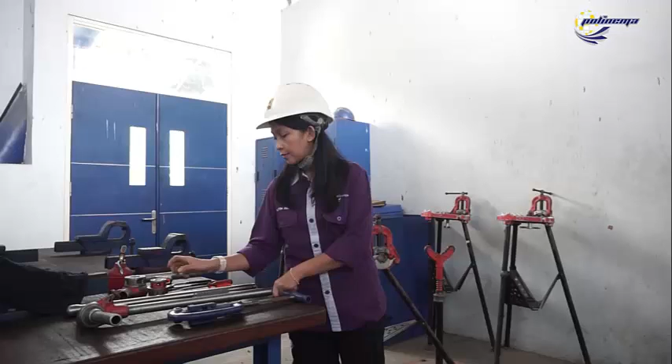The equipment we would like to use here is a pipe cutter, burring reamer, and dies to make a thread or screw for 3/4 diameter and 1/4 diameter. This is the holder of the dies.

This is a brush for cleaning up the pipe. Marker for measuring, to give a mark on the measured pipe. This is a screwdriver for cleaning the pipe. This is a plier, also for cleaning the pipe.

The meter. This is the vise or clamp to hold the pipe, and the stand for holding the pipe. And grease to make the screwing process easy.

The material used is the galvanized pipe. This one has a diameter of 3/4. And finally, this is the result that we will make in this job sheet: the cutting on this side, and the screw.

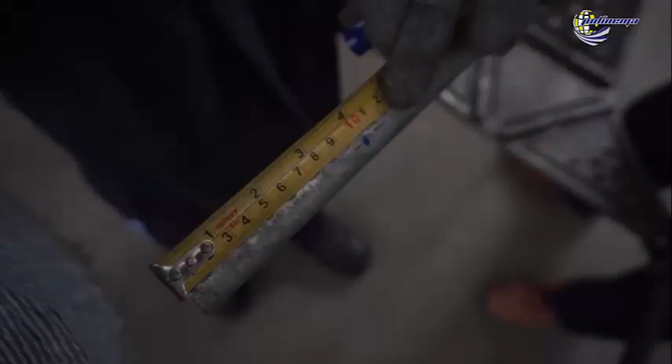That's all the explanation. This is the working instruction. First, measure the desired pipe length with a roll meter and marker. Second, set the pipe on the vise and stand.

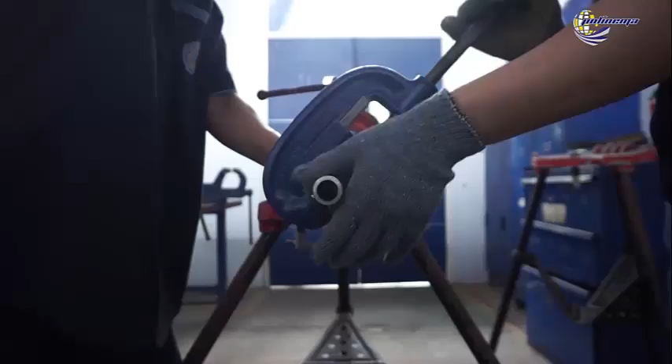Tighten the vise. Put the dies in the wrench. Fifth, cut the pipe with a manual pipe cutter.

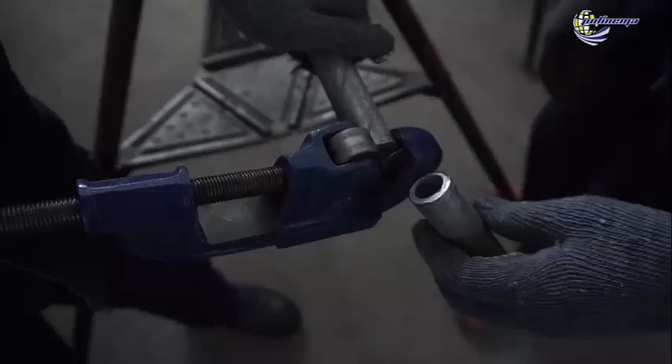Sixth, when the pipe is cut using the pipe cutter, the diameter of the pipe will narrow. To restore the shape, use the burring reamer for maintaining the size.

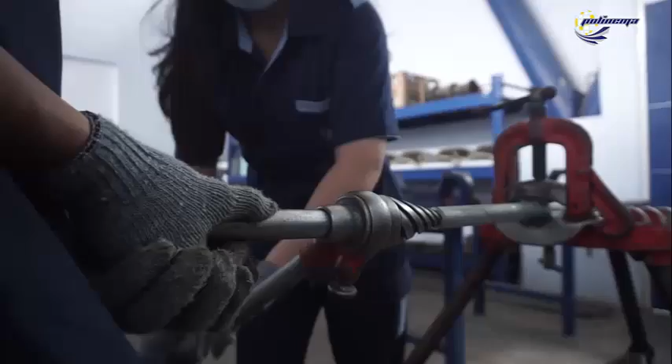Seventh, apply the dies in the threader to the pipe to make 10 external straight threads. Drip with grease to make the process smoother.

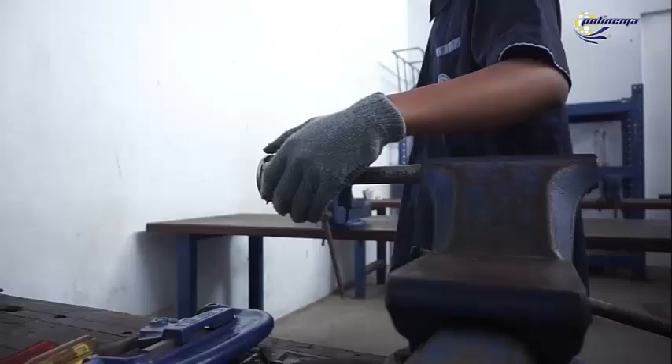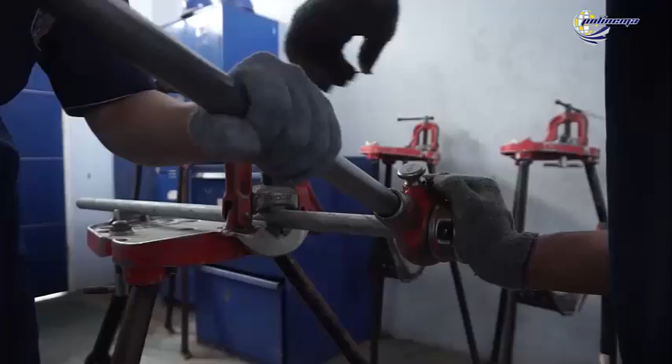Remove the dies. Apply the burring reamer. Use plier and file tools to clean up the screw if necessary. Finally, clean the iron powder and oil with a wire brush and cloth.

In chapter 3, we learned the layout of drainage network. The learning outcome of this section: a student is expected to be able to describe the drainage network, including channels and structures, according to the technical drawing standards.

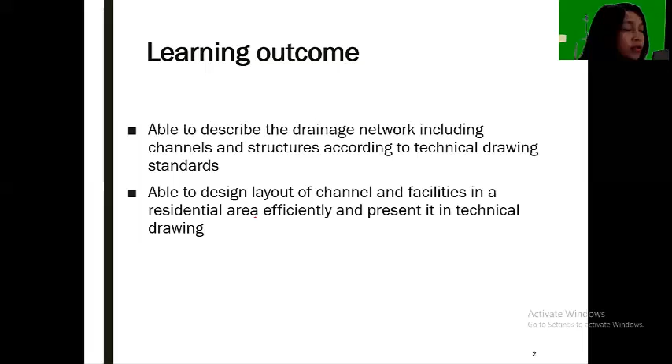And next, you are expected to be able to design the layout of the channel, the placement of the channel and facilities in a residential area efficiently.

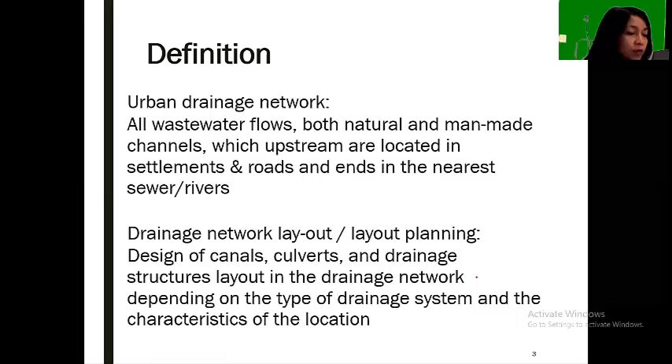The definition: urban drainage network is all wastewater flows from natural and man-made channels. And drainage network is the layout of the channel and the structure presented in a map. So in this chapter, we would like to draw a drainage layout map like this.

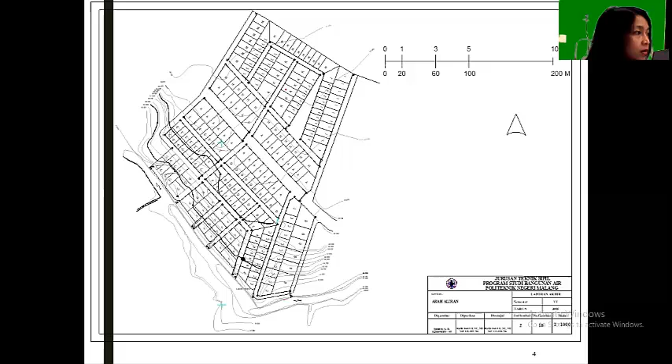In between the blocks, there are roads, and also this map has a contour map or topographical map like this. This is the topographical map showing the contour map. You understand already the contour map.

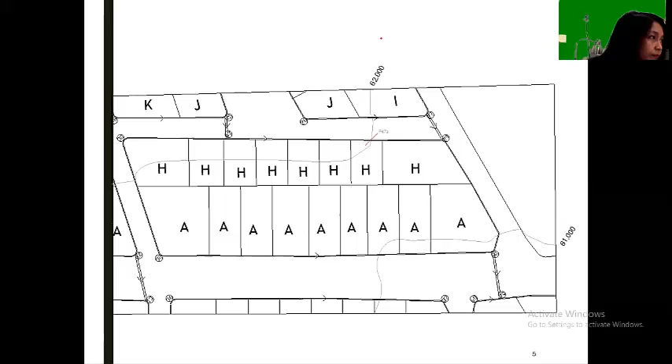Contour map is a map that has contour lines, which means a line that shows a location which has the same elevation. So when we follow this line in its direction, it means all locations on this line have the same elevation, which is 62 meters above mean sea level.

This one is 61. So the interval of this contour, we say the interval is 1 meter, which means the elevation difference between this line and this line.

The layout of the drainage network consists of the line itself. This is the line of the channel, which means the position of the channel. We call it the trace.

And also the direction of the flow, which flows from the higher to the lower.

And also the culvert, like this. This is a culvert. Culvert shows the channel that crosses a road or any other facilities.

So normally this channel is a closed channel. Closed, because it crosses the road, so we must use a closed channel, culvert, or gorong-gorong. In Indonesia, in Bahasa, we say gorong-gorong.

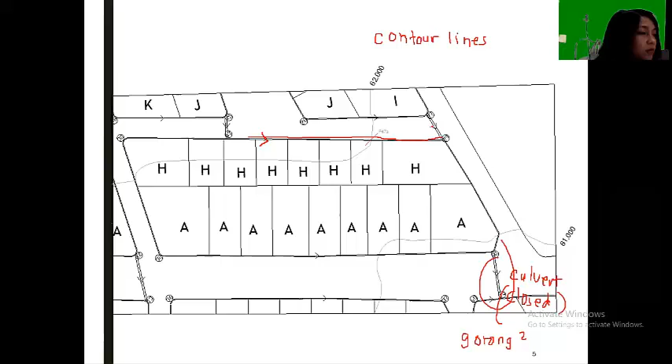This is the layout plan of the typical road. Normally, the drainage channel is located on the side of the road. When this is the road, the channel is here and also somewhere here—on the left and right side of the road.

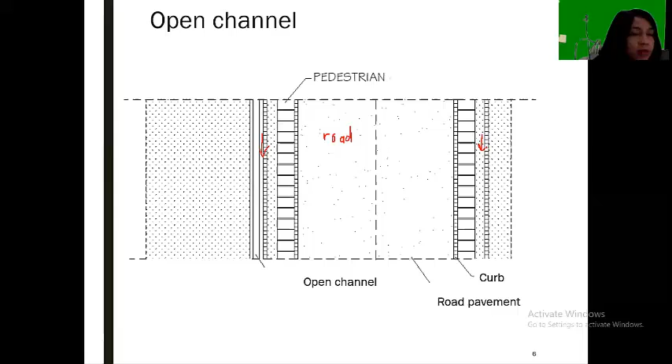When we make a cross-section of this road plan, we can see that the road has an axis. This is the axis of the road, and the road has a slope to the left and to the right of about 1 to 3%.

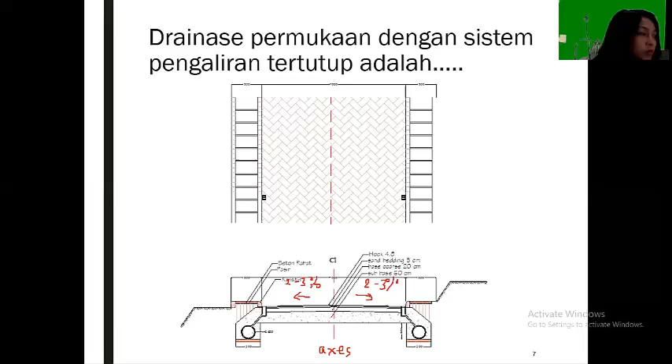The purpose of making the road slope is 1 to 3%, to allow the water from rainfall above this road to be easily discharged to the side channels.

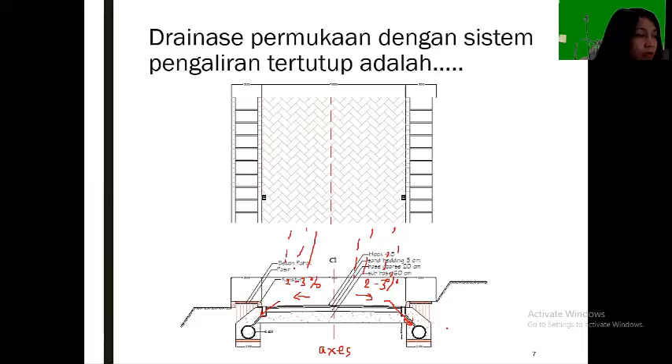In this case, the channel shape is round, so it is not an open channel. This is another example of an open-shaped channel, not open channel. We usually say open-shaped channel.

The same for the road, it should have a slope to the left and to the right. So what we want to design here is the channel on the left. When this is the direction of the flow, we design the channel here, and also here.

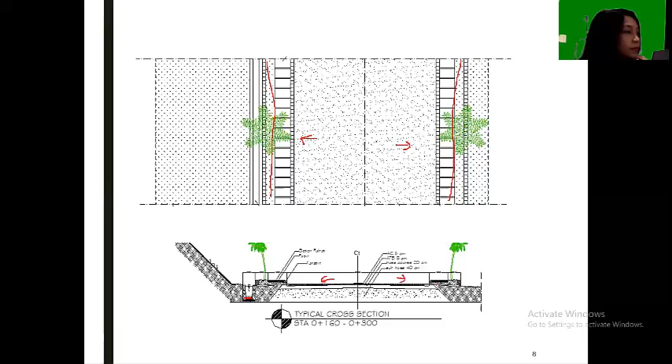The data needed for making the drainage channel network map is a topographical map with an interval of 0.5 meters. It is very good if you have 0.5 meter interval, but 1 meter is also enough. You also need the drawing of the road plan and cross-section of the road if you have it, and also a situation map which shows the facilities and land use.

Land use means the land cover, which is housing, or maybe garden, cemetery, school, or mosque. Any facility should be shown in the map. And if you design the major drainage channel, you need the city master plan.

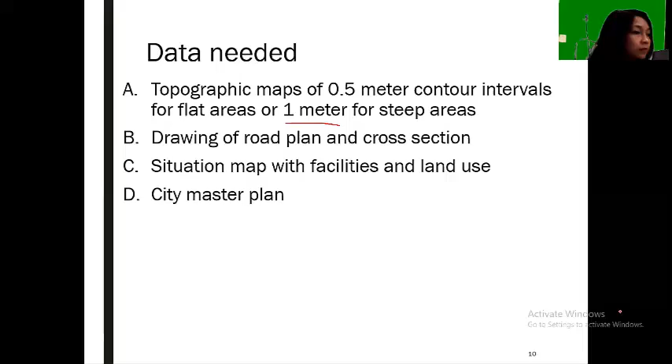The criteria of the layout of the drainage network: you have to make sure whether your area has a mixed or separated drainage system. Mixed means between the rainfall, rainwater, and wastewater.

In Malang, unfortunately, as I explained in the first chapter, we still combine the rainwater and wastewater. It is not good actually. But some housing areas, which are new residential areas, have already separated the wastewater, and the wastewater goes into the wastewater treatment plant first before discharging to the drainage channel. So we assume in our case, we use this combined water system.

The second criteria: we have to understand which direction the natural flow comes from. We should understand the situation even if we do not come to the location or do a survey, by checking the contour map, to see which direction the flow will come naturally. It should come to the river normally, or a lake or sea, because they are naturally located in the lowland area.

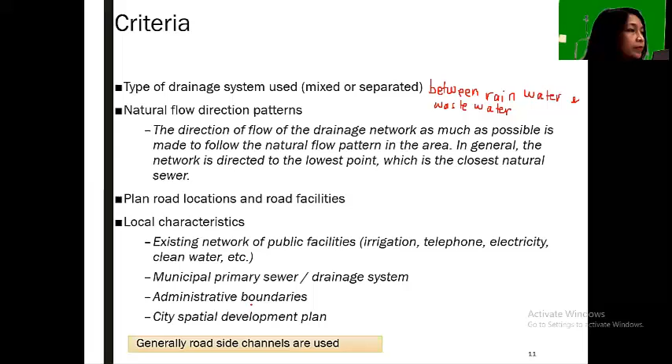Another important criteria is the local characteristics, whether you have an existing network of public facilities, for example irrigation, electricity, clean water, and you may already have some existing pipe there. The steps of making the drainage layout map: first, you have to draw the drainage trace line, and determine the elevation of each channel at the upstream and downstream.

In this case, you have to use interpolation again, but the interpolation here is not a table, but the contour lines.

After that, you define the flow direction, of course by using gravitational flow. We decide the flow direction from upstream to downstream, or from the higher elevation to the lower elevation.

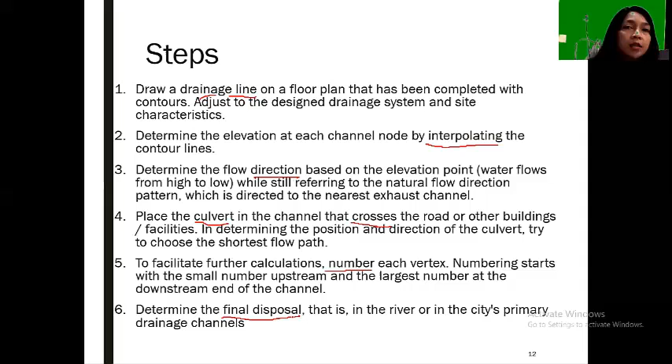Number 4 is you place the culvert at the crossing with the road. Then you number each channel, and finally you determine the final disposal, meaning the major drainage channel or the river. This is the final outlet of our drainage system.

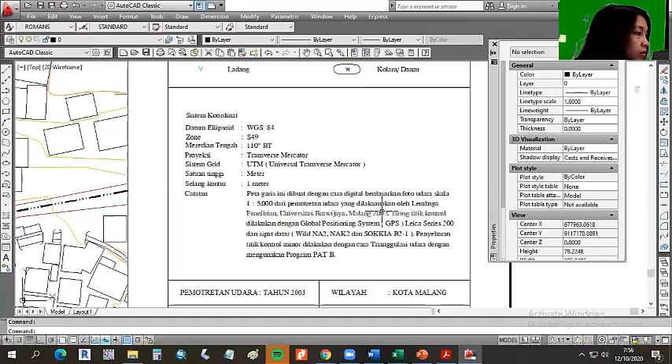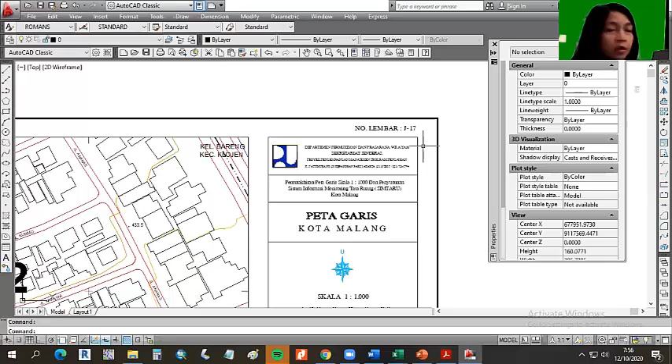This map is produced by the Ministry of Public Works Indonesia. It is an old map, produced in 2004, I think, or 2003. But the contour map or topographical map is usually fixed, unless we make a land grading or do too much cutting and filling. Normally, because contour is the earth surface form, it usually does not change, even though this map is old.

This map number is J17. J17 means the code of this map. So you can see from this index map, this is the boundary of Malang City, the purple or black color boundary of Malang City, not Malang Regency.

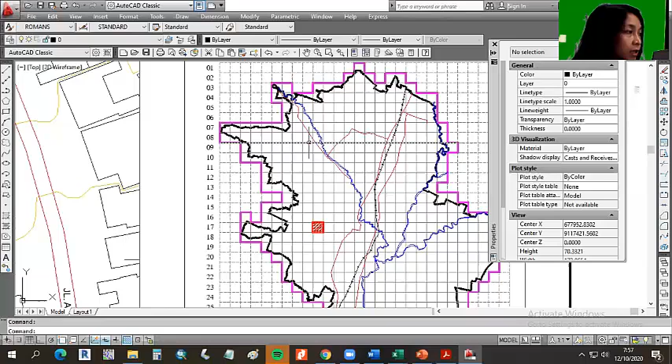So normally we take one grid for our analysis for the assignment. So what is this? J13? J17? J17 is here, the red grid. One grid is one sheet of map.

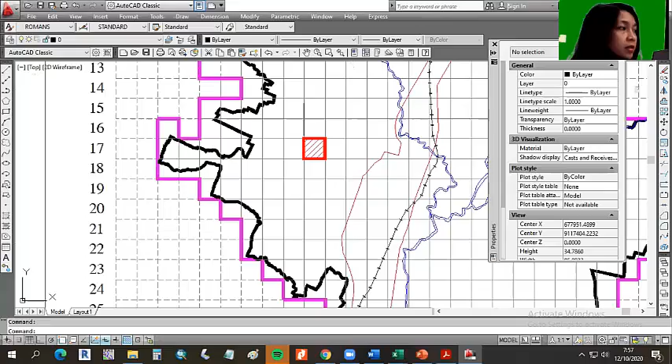So J17 is here, this is J and this is 17. When you need the map above this grid, you should request J16 from me. But I think one map is enough for all students.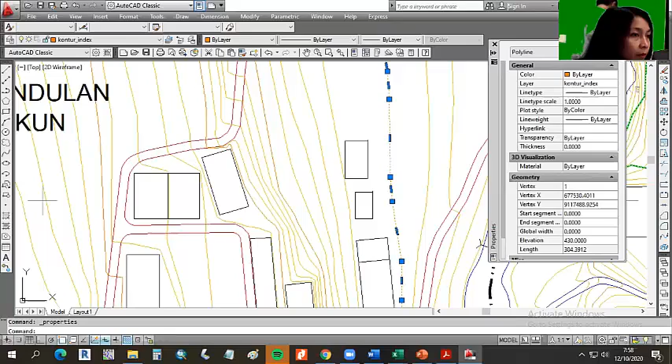If you want to know the elevation of each contour line, you click properties, right click and see properties, and you will see this box. From this dialog box, you can see the elevation is 430 meters above mean sea level.

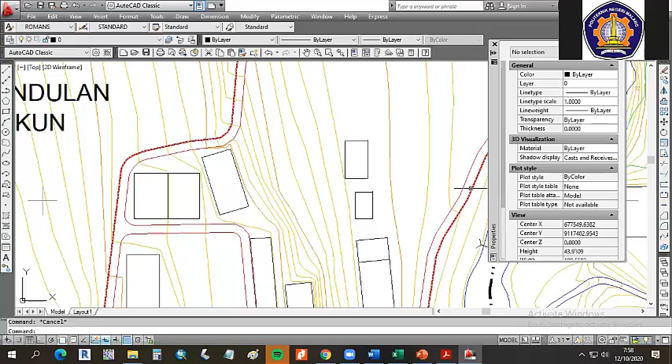So the interval, let's see the next lines, is 429. This one is 428, this one is 427. So the interval is 1 meter.

I hope you already understood how to read the contour map. Maybe you learned this already from the topography course or the surveying course. Let me explain the characteristic of this area by reading the contour map.

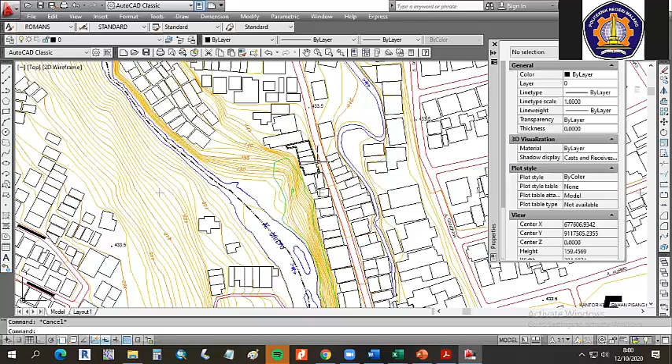When the contour lines are close to each other like this, it means this area is a steep area. Steep means the slope is big. It is correct because there is a river around here.

This river is called Kalimetro. The direction is from top to bottom, or from north to south. So when the land is close to the river, it usually has a steep slope.

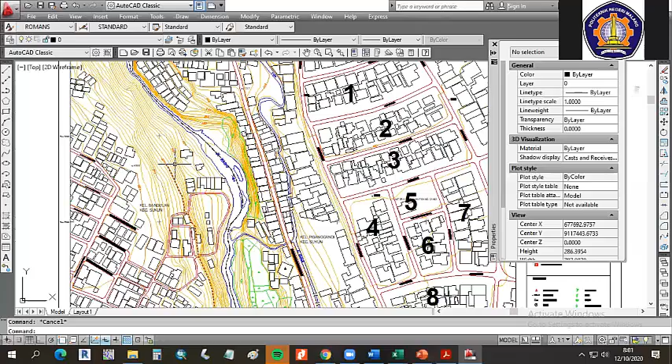That's why the contour lines are close to each other here. When the contour is dense like this, it is a steep slope.

When the contour lines are far from each other like this, sparse or far, it means this area is relatively flat.

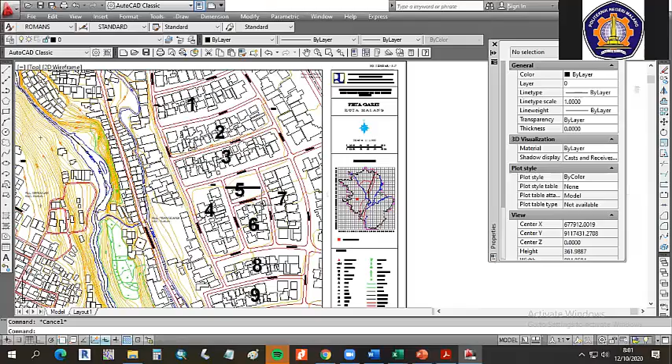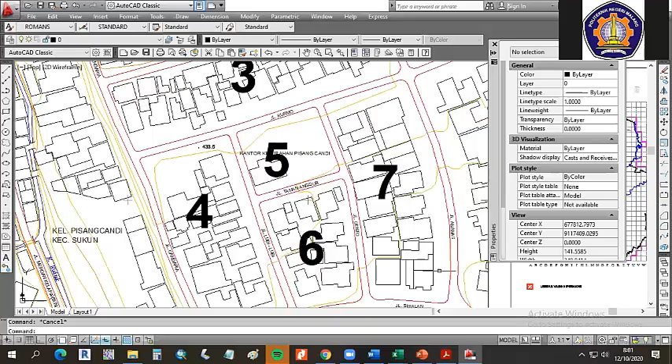So when you get block number 3, for example, you have a flat area. But number 7, your area is steep because there are many contours located on this block.

Because on the left side there is the Brantas River basin, we can assume the direction of flow should be to the south, since the Brantas River also moves from north to south. And also to the left, because the location of the river is on the left side. So the flow should be to the left and to the south.

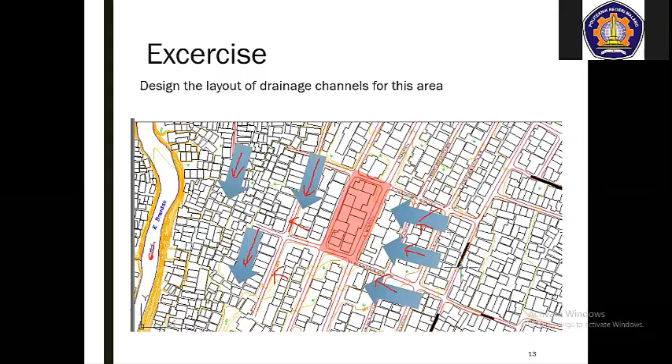When we zoom into the block, it shows this kind of condition. There are several contour lines located on this block.

For example, this is one contour line, this is another, and this is another. So at least 3 lines are here. This location is relatively steep.

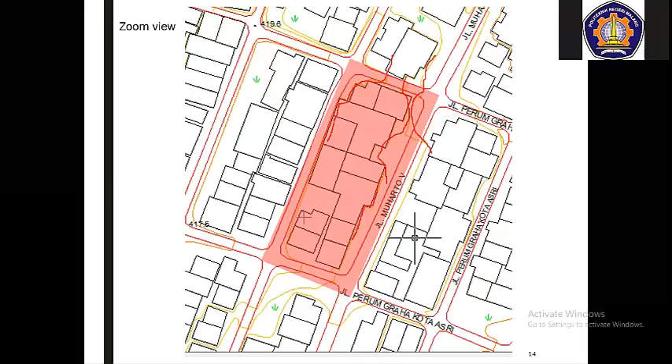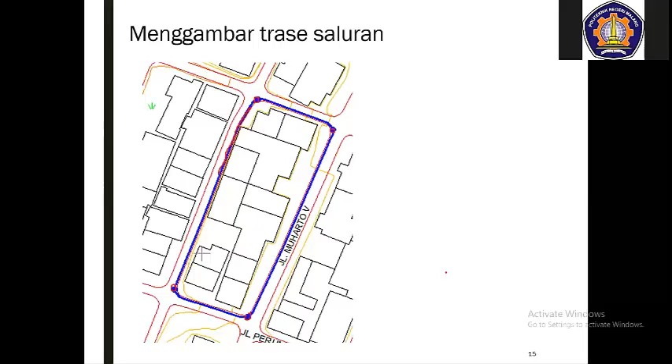When the channel is turning, bending, or crossing, you should add at least one node for one bending or one crossing. So basically, the more nodes we make, the more accurate our calculation will be.

Then the next process is interpolating the contour. What does this interpolation mean? We want to know what is the elevation of this dot, this point.

So let's move to the calculation of contour interpolation. This is an example of different contour lines. We want to calculate the right points here. So this is the left bottom, this is the right top.

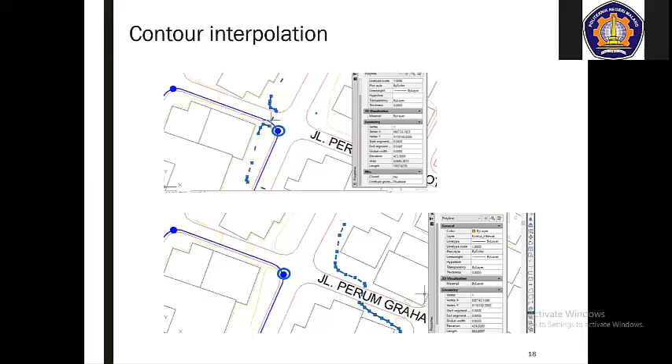The interpolation of the contour is made by measuring the distance between the high contour and the low contour. Low contour is 423 and high contour is 424. And we want to know this dot, what elevation.

We measure first the distance between the low contour and this point, by using the function of distance in AutoCAD. This is the distance, or you also can use dimension. By using distance, you can see the length is 2.549 from the low contour to the point.

And we also measure the point to the high contour. By using distance again, we can get the information of the distance. It is 17.484. So after that, we make the ratio of the triangle like this.

This is the low contour, this is the high contour, and we want to know how much the elevation of A, or this point. So we put the distance from the low contour to the point and distance of the point to the high contour, and we make the equation like this. This is the simple ratio of triangle.

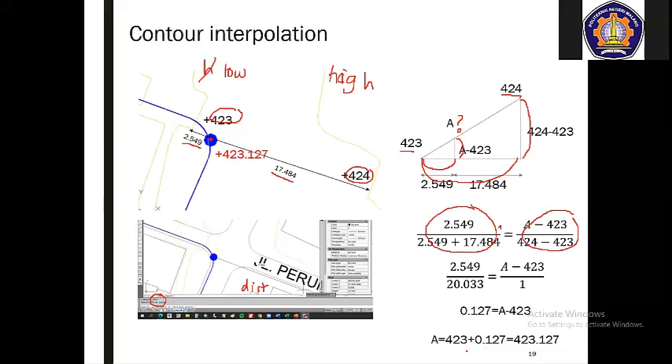So the ratio, if you use the manual calculation, the ratio of the horizontal, the short distance to the overall distance will be the same as the ratio of the unknown point to the lowest contour and the highest contour to the lowest contour. The ratio of this is the same as the ratio of this. After that, we make a simplification of the equation, and this is a simple mathematics. And after that, you will get the A elevation.

The next step is drawing the channel direction and numbering the nodes and placing the culvert. After we finish the interpolation, we will get the elevation of all points. So you write the points on this map. Each point should have an elevation.

After that, you check the flow direction. Of course, the direction will be from the higher to the lower. We give a mark of the direction by using this arrow. One channel, one arrow is enough. No need to put many arrows to avoid the complexity of your drawing.

Then next step is you put the number of the nodes as an identity of the node: 1, 2, 3, 4, 5. Normally we give a small number in the upstream and big number in the downstream. Then after that, you decide the location of the culvert. This is culvert here.

The culvert location should be in the lowest point. The lowest point is number 4. So from number 4, which direction we should make the water flows? Can be to the left and to the down, either to the left or to the down, because we check from the river direction. From here, you remember, the river is located in the left and the direction is from top to the down.

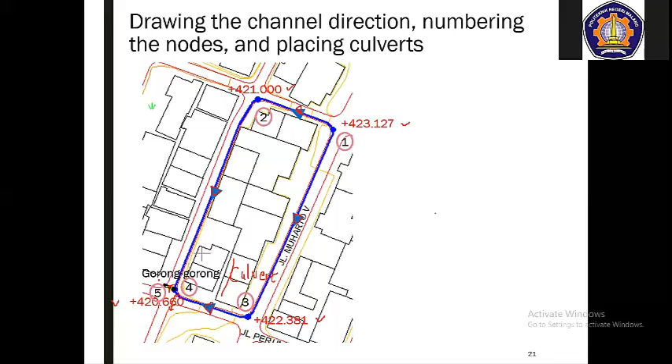The next procedure is finding the final outlet of this block. Yes, of course, we will discharge the rainwater from this block to the Brantas River stream, but we have to find the correct path. So it should be in the left or right side of the road like this. When the road is stopped, when it comes to the end of the road, because this is end of the road, you should find the way in between the housing.

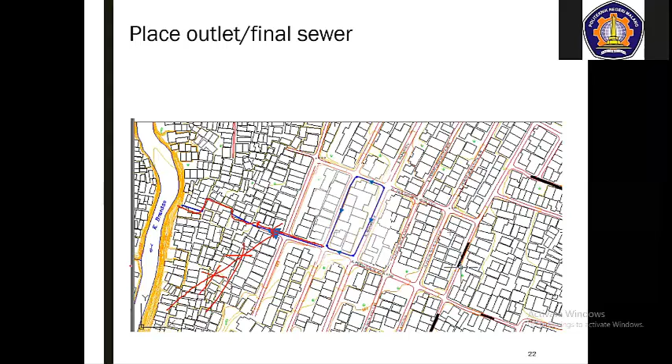You should not cross the housing to make a channel. For example, you put like this, it is not good. You should find the proper path of the channels and put the flow direction, and it is done. It's finished for designing the drainage network layout.

After this, we continue the calculation to the design flood analysis.